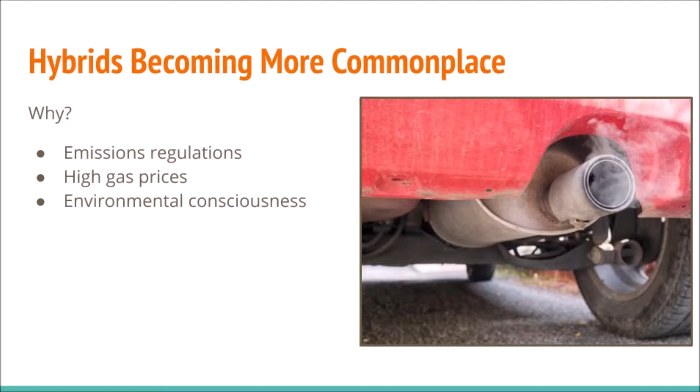It's a misconception, though, to think that hybrids are a new thing. The first hybrid was actually developed back in 1901 by Ferdinand Porsche, and it was called the Semper Vivus model. The Semper Vivus used a gasoline engine, which provided mechanical energy to a generator, which changed that energy into electric energy and used that to operate the electric motors, which rotated the drive wheels.

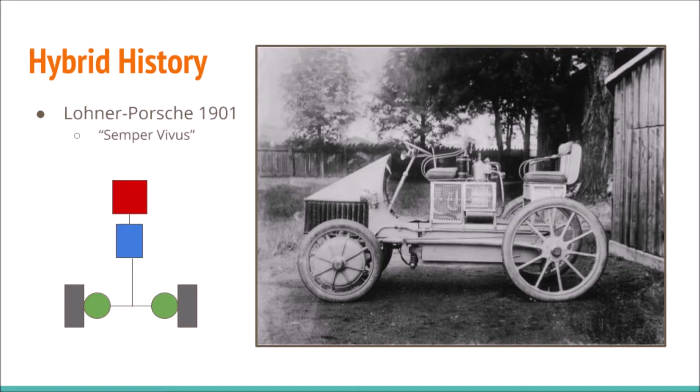This technology stuck around for a couple of decades back then as well. One of the later versions was the Owen Magnetic in 1916. This was invented by a man named Justus B. Entz, and he was actually from New York. He worked with Thomas Edison in order to create this transmission. This transmission was made up of a 24-volt generator and an electric motor.

The cool thing about the Owen Magnetic is that it introduced the concept of regenerative braking. That doesn't seem like a huge deal to us now, but back then regenerative brakes were really good compared to what was available on conventional cars. Most vehicles back then weighed between 3,000 and 4,000 pounds, and they only had rear brakes. If they got wet, you were pretty much SOL.

But as I'm going to talk about later on, regenerative braking basically uses the electric motor to help slow you down while it charges the battery. So back then, it was great. The regenerative brakes could slow the vehicle down for them. They didn't have to rely on mechanical brakes that weren't so good yet.

So as you can see, hybrid vehicles have been around for a long time. They're just becoming more common to us now. And we're getting to a point now where manufacturers can produce them for a lot less and make them more available to the market in general.

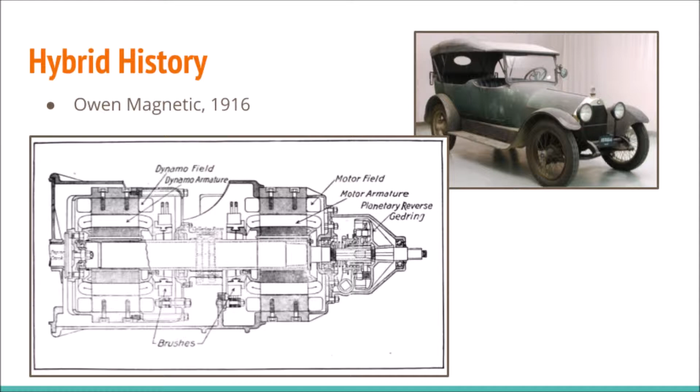There's a lot of different vehicles out there that qualify as being a hybrid vehicle. Manufacturers have come up with a sort of classification system in order to make it clear as to what sort of features you could expect on a particular model. The four most common classification terms are micro, mild, medium, and full.

A micro vehicle is essentially your conventional gasoline engine vehicle with start-stop technology added on. It is interesting to note that even just with the start-stop technology, you're already saving up to 5% on your fuel costs. Obviously, if you are a city commuter, you're going to be saving more, on the higher end, because you're going to be stopping at traffic lights a lot more often, whereas if you live here in upstate New York, probably not as much.

Next, you have mild hybrids, and really the biggest difference between mild and micro hybrids is that the electrical motor is able to assist the gasoline engine, and the fuel economy improvement for a mild can get up to 10%.

The medium classification isn't as commonly used. Any hybrid that kind of falls in between that mild and full stage could be considered a medium hybrid. At this point, you start to see the downsized engines, and the fuel economy improves even more, up to 20%. With a medium hybrid, there's significantly more going on electrically, but the vehicle still cannot be propelled by the electric motor alone, at least not from a stop.

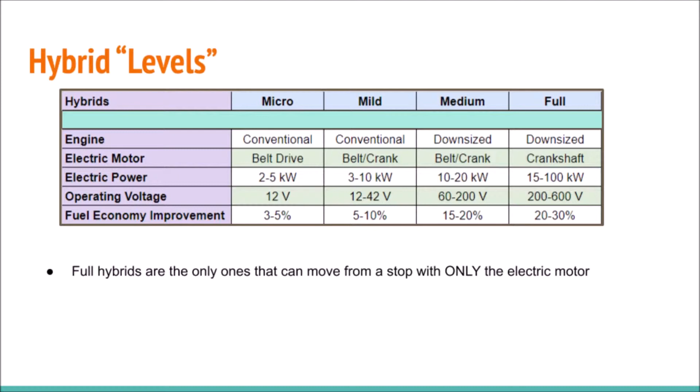And the fuel economy improvement can get up to 30%, which is very significant. Now, there are two main types of hybrids, and those would be series and parallel.

Now, those terms might sound a little familiar to you. If you recall from basic electrical, you have series circuits and parallel circuits. In hybrids, it's very similar.

In a series hybrid, everything is pretty much a straight line: the engine goes through an inverter to charge a battery, which is powering the motor, which is driving the wheels. Some advantages of a series hybrid system is that it can use a smaller engine, and this engine can run at its most efficient RPM at all times because it isn't directly connected to the drive wheels. It has nothing to do with the drive wheels. The motor takes care of all of that, so all it has to worry about is charging that battery. And it's a pretty simple system too.

In a parallel hybrid, on the other hand, the engine or the electric motor may drive the wheels, and this can happen in any combination, really. Some advantages to this is that there are less electrical components, which could result in an overall lighter vehicle. And another advantage is that the engine can supply the extra power if you need it, when you need it. Unlike the series hybrid, which only has that electrical motor, and if the electrical motor doesn't have enough juice to get you up that hill, then there's not a whole lot the vehicle can do to help you out.

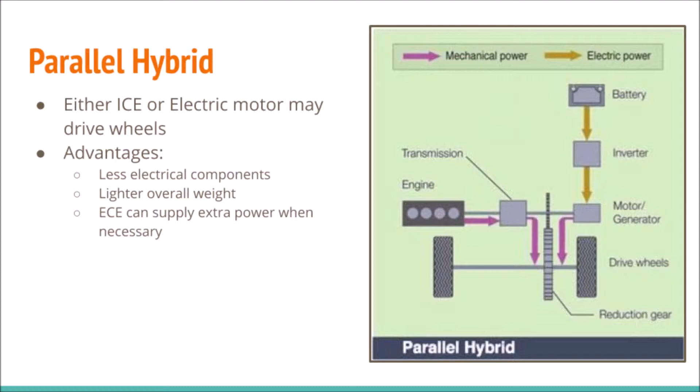Now I'm going to get into detail about the 2004 Toyota Prius. The Prius is an example of the third style out there for hybrids, and that would be the series-parallel or Power-Split hybrid. Basically all this means is that the powertrain system on the Prius has the ability to run as either a series or a parallel system.

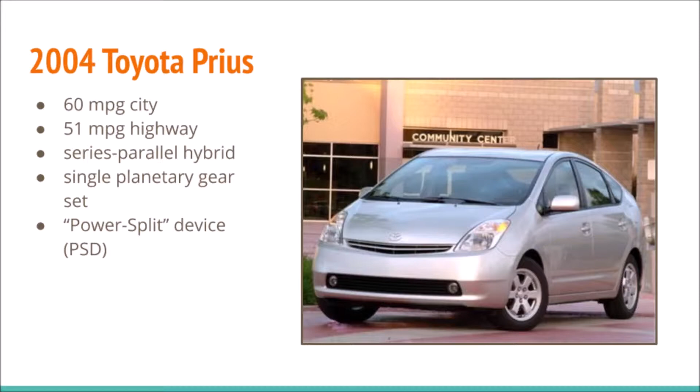Toyota launched the Prius in 1997, and it was the first widely available hybrid on the market. Its drivetrain consists of an internal combustion engine, 2 or 3 electric motors depending on whether or not you have four-wheel drive, a planetary gear set which is referred to as the Power-Split device, an inverter, a battery, and of course the computer module that controls everything, the ECU.

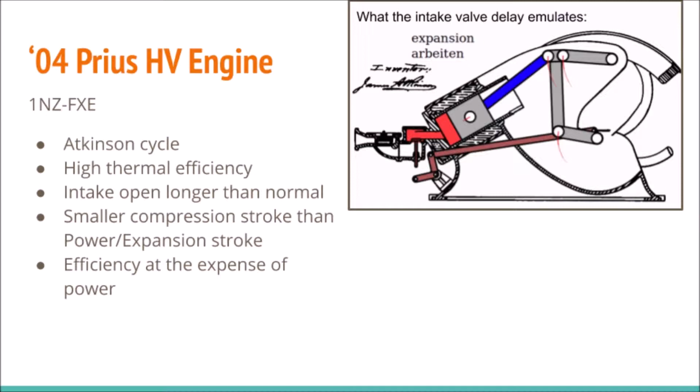The 2004 Prius uses the 1NZ-FXE engine. This engine is an Atkinson cycle engine. Most conventional vehicles use what is called an Otto cycle engine. What's different about the Atkinson cycle engine is that it varies the amount of piston movement in order to increase efficiency.

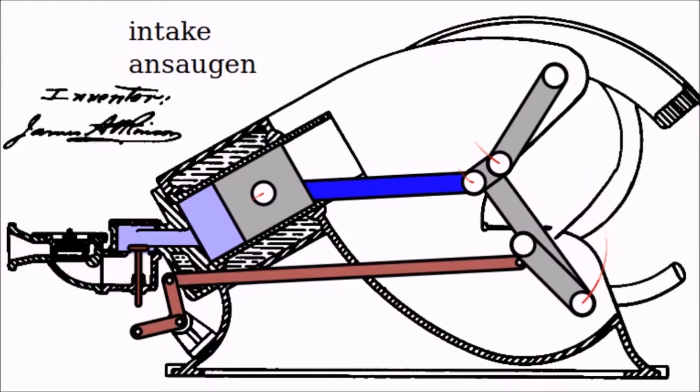Early on in the Atkinson's development, this was done with a series of complicated arms, as you can see in this animation. Nowadays, it's done by delaying the intake valve closure so that during the compression stroke, some of the air-fuel mixture gets forced back into the intake manifold. This mimics the effect of having a shorter compression stroke than expansion stroke. What this allows the engine to do is get the most energy out of the fuel as possible. But this also limits the power output that the vehicle is capable of.

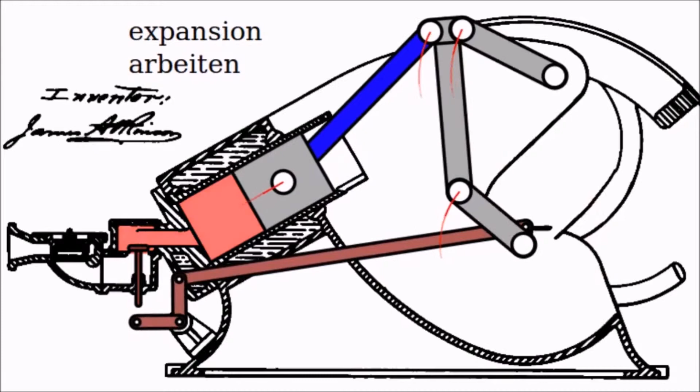Now, in a conventional vehicle, this loss of power would be noticeable. But with the Prius, the electric motor is able to compensate for this loss of power, so the driver doesn't even notice it. Now I'm going to talk a little bit about the electric motors used in the 2004 Prius.

These motors are referred to as MG1 and MG2. MG1 is the smaller of the two electric motors. This is the motor that is mostly responsible for recharging the high voltage battery. During certain driving conditions, it also supplies electric power to MG2 and is used as the starter motor for the engine when that turns on.

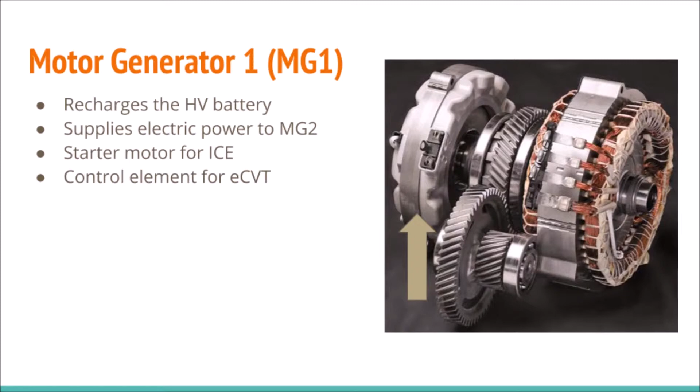So essentially, MG1 acts as the vehicle's starter as well as the vehicle's alternator. We'll talk about it in depth later on, but MG1 is also the control element for the ECVT. The gear ratio of this transmission can be adjusted by changing the RPM of MG1.

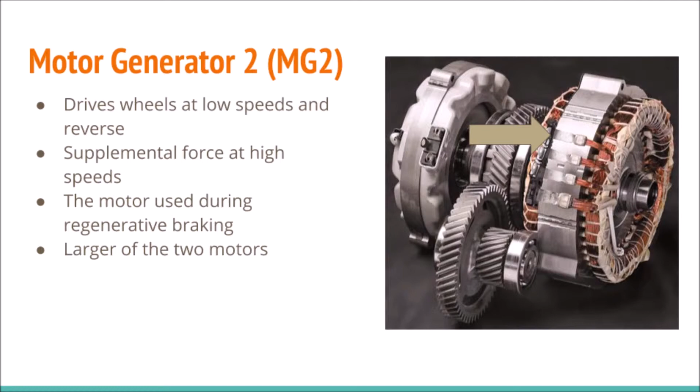MG2 is the larger of the two motors. This is the motor that's responsible for providing drive power to the wheels. When the vehicle is traveling at higher speeds, it supplements the power that the engine provides. Because this is the motor that is directly connected to the wheels, it is the one that is also used for regenerative braking. Speaking of regenerative braking, let's go over that really quickly.

Now, the whole purpose of regenerative braking is to make your vehicle more efficient. If you recall from your physics class, energy can't be created or destroyed, it just changes form. Your internal combustion engine takes chemical energy and turns it into mechanical energy. That mechanical energy goes through the transmission system and ends up being kinetic energy as it gets to the wheels. When you slow down your vehicle, that kinetic energy is turned into heat energy. And once it's in the atmosphere, it's gone. You can't use it anymore.

Regenerative braking helps remedy this by using an electric motor to help slow the vehicle down, in combination with the brake pads. The same motor that's used to drive your wheels can be used as a generator under deceleration or braking conditions. When your motor is being used to drive the wheels, it is receiving an electrical current from some source, whether it be a battery or whatever that particular vehicle happens to be using. That electrical current creates a moving magnetic field which rotates the rotor inside the motor. This gets your wheels moving.

Now, when you're decelerating or braking, the opposite happens. The motor is no longer receiving a current from an electrical source. Instead, the kinetic energy of your vehicle keeps the wheels turning, which in turn continues to rotate the rotor inside the motor, which generates a voltage in the stator coils. This voltage is what goes back to charge the high voltage battery.

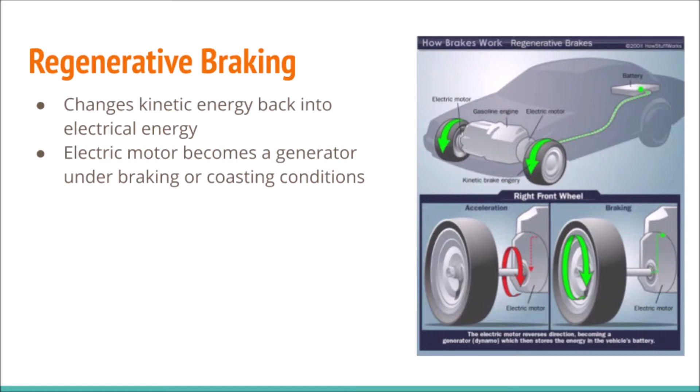One of the added benefits to this is that because the motor is helping to slow your vehicle down, there's less wear and tear on your brake pads. Now, the brake pads are still there. Obviously, if for some reason your regenerative braking system fails, they're there to back you up. And also, the motor cannot provide enough stopping force in an emergency situation. Like, say a deer jumps out in front of you, the motor's not going to be able to stop you in time. So your vehicle would still use conventional brake pads in that case.

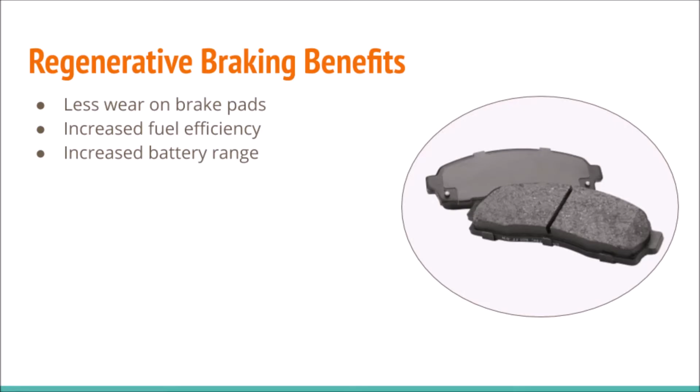So just a couple more details about the motor generators. Both of them use permanent V-shaped magnets in the rotor. These magnets are new as of 2004, and changing to that shape added about 50% power versus the horizontal magnets in previous models.

And both of the generators also have what is called a speed resolver on them. These are disc-shaped sensors, essentially, and speed resolvers consist of an oblong-shaped rotor that rotates along with the generator, and the sensor that has 3 coils, about 90 degrees off of one another. Now, as the rotor spins, the oblong shape produces a pattern in the current, so the ECU can tell exactly where that generator is in its rotation.

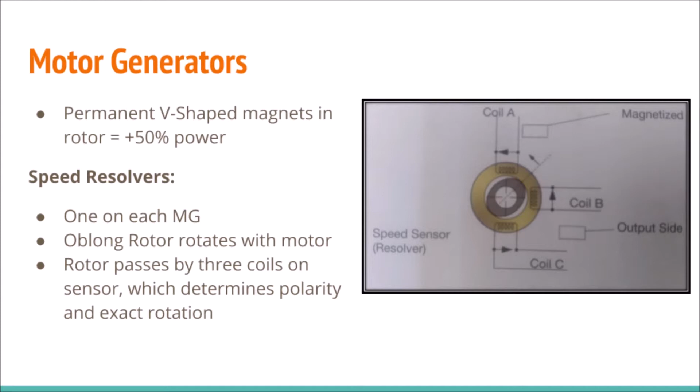The planetary carrier is what's connected to the engine. Now, the ECU is able to keep the RPM of the engine constant while it varies the RPM of MG2. This is so that the ECU can keep the engine operating at its most efficient speed. Now, if this planetary carrier isn't rotating, that means the engine is off. The planets will still rotate, obviously, but if the carrier itself is still, then you know the engine is off.

And finally, the sun gear is the component connected directly to MG1. Now remember, MG1 helps to start the vehicle, it's used to charge the battery, and it's also used to help maintain a proper gear ratio, as you'll see in just a second.

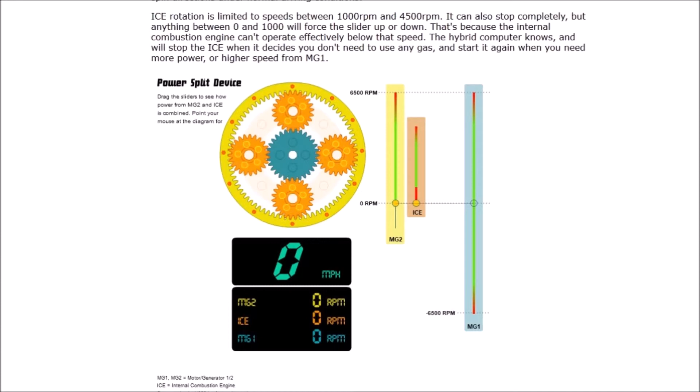I'm going to go over different driving scenarios. This is what it looks like when the vehicle is performing a light acceleration from a stop. Notice MG2 is providing all of the driving force in this situation. The internal combustion engine is off, and MG1 spins in the opposite direction because it doesn't really have a choice. If it moved forward as well, the gear set would bind up. It's important to note MG1 is just freewheeling. In this case, it is not producing electricity.

So this is what it would look like with a normal driving condition. The internal combustion engine has turned on at this point, and MG2 is providing assistance with giving the vehicle the proper amount of power. MG1 is rotating in the opposite direction, still at a lower RPM. I exaggerated this a bit just so it was easier to see. MG1 is providing electricity at this point, and that electricity is going to support MG2, so MG2 can do its job without drawing on the battery as much.

Now this is what it looks like in a high-speed cruise or full throttle condition. At this point, all three gear components are rotating in the same direction, and that's because MG1 is now receiving electrical current from the battery, so that changes its rotation direction. MG2 is also receiving electrical current from the battery. It is providing assistance to the internal combustion engine so that the engine can continue to provide the power it needs without getting out of the green zone and into the red inefficient zone.

Now, MG1 rotating in the same direction means that it is now helping to create an overdrive gear ratio so that it's easier for the vehicle to maintain its higher speed.

This is what it looks like when the vehicle is decelerating or braking. As you can see, the internal combustion engine has turned off, and because the planetary carrier is no longer rotating, MG1 has no choice but to rotate backwards. MG1 in this case is not providing any electricity, it is just idling. And MG2 is continuing to rotate because of the inertia in the wheels.

And because of this, as you recall when we just talked about regenerative braking, that's what's happening in this scenario. MG2 is being rotated not because it is receiving current, but because of the momentum that is still in the wheels. As that momentum is used up, MG2 will continue to slow down, and then eventually the brake pads will take over and stop the vehicle. That's close enough, you get what I'm saying.

Now in reverse, the internal combustion engine remains off. All of the drive power comes from MG2 in this case. And MG1 is again just idling. It's not producing any electricity.

While I have this diagram up, I want to show you guys what I meant when earlier I called this an electronic CVT. CVT stands for continuous variable transmission. It means the gear ratio has limitless possibilities. Most conventional transmissions have fixed gear ratios, so you have 3 to 1, 1.5 to 1, stuff like that. A CVT transmission can pick and choose its exact gear ratio for any driving condition.

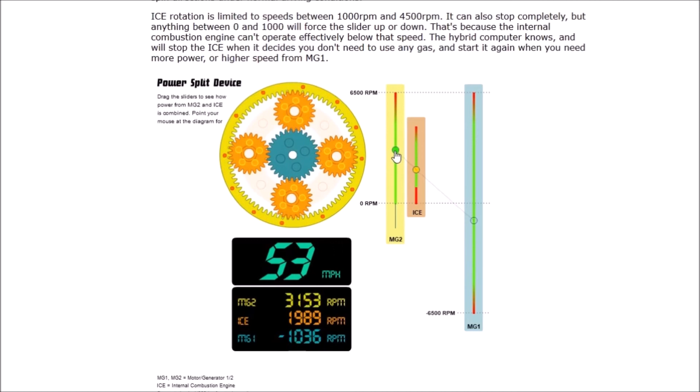And this is an electronic CVT because, as you can see, all I have to do is slide this and you can see the differences. Here, if you needed an underdrive, there's an underdrive. There's your overdrive. Oh, if we go too far, it goes backwards. But it's just all of these - the ECU has complete control over the exact gear ratio in this carrier. So that's what I mean when I call this an electronic CVT.

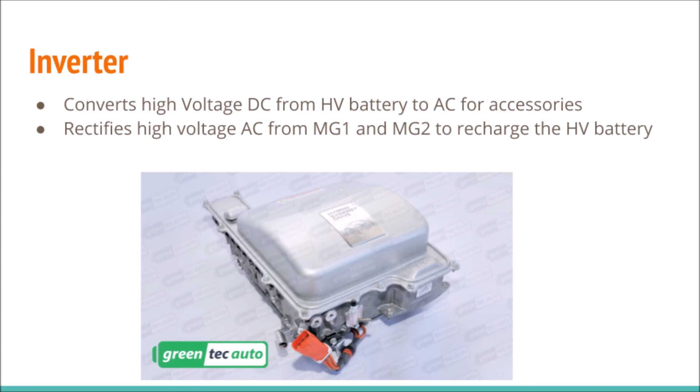For the last two components, you have the inverter and the high voltage battery. The inverter is essentially just a translator. It takes alternating current and changes it to direct current for the components that need it, and vice versa. The high voltage battery is essentially just a power storage unit. It stores electricity recovered by MG2 while regenerative braking is taking place, stores power generated by MG1 in normal driving conditions, and also supplies power when the vehicle is starting or when additional power is needed, such as in a full throttle or high-speed cruise condition.

Hybrid powertrains is an extremely broad topic, and there was a lot to talk about. Just to recap what we went over, I talked a little bit about hybrid history, different hybrid levels and types, and I also went over some of the drivetrain components in the 2004 Toyota Prius. I could talk for hours about hybrid vehicles. There is so much information out there and so many different ways that manufacturers approach these types of vehicles. Hopefully you learned something. I know I definitely learned a ton doing this project.